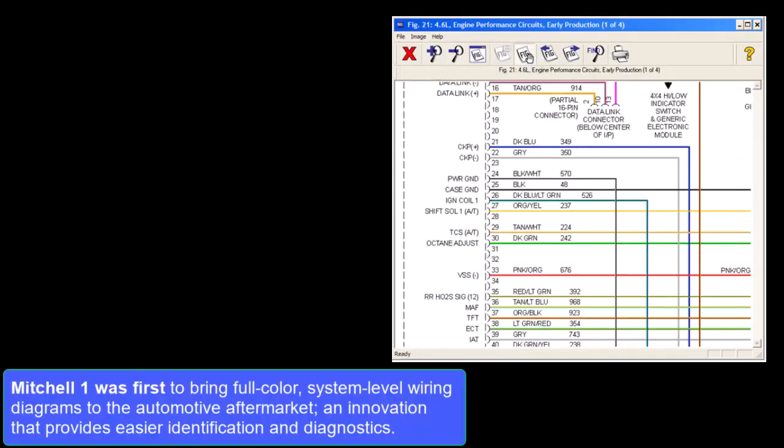Mitchell 1 was first to bring full-color system-level wiring diagrams to the automotive aftermarket, an innovation that provided easier identification in diagnostics. Since these scalable vector graphics, or SVG, diagrams are built digitally like an engineering file, the diagrams retain clarity no matter how much they're zoomed in.

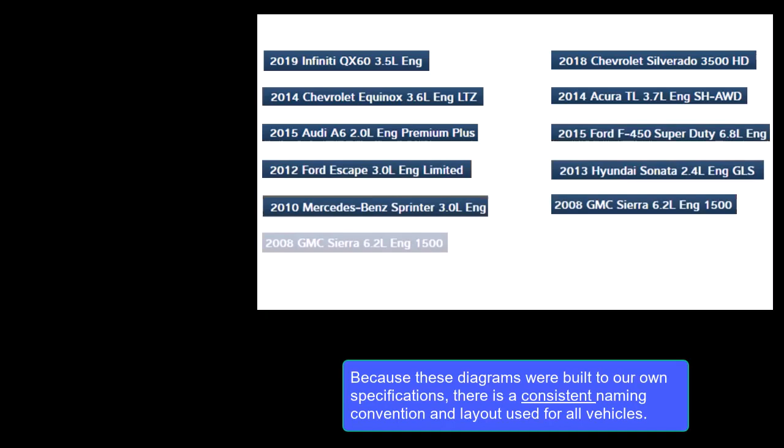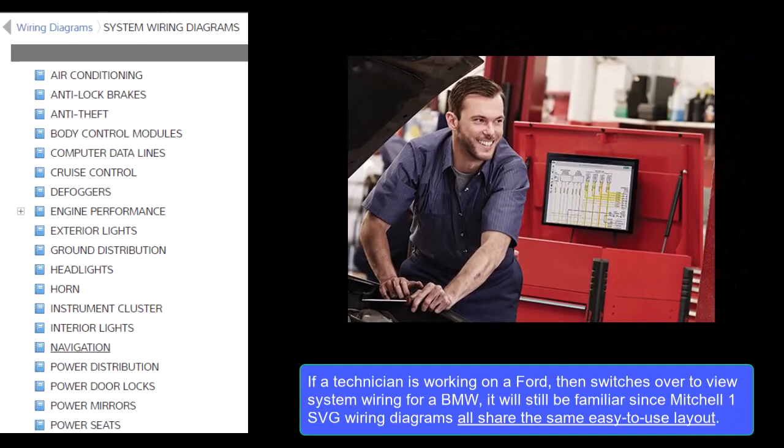Because these diagrams were built to our own specifications, there is a consistent naming convention and layout used for all vehicles. If a technician is working on a Ford, then switches over to view wiring for a BMW, it will still be familiar since the Mitchell 1 SVG wiring diagrams all share the same easy-to-use layout.

With increasing electrical and mechanical complexity, you need wiring diagrams that simplify your diagnostic task. Component focused: with a single click, you can select a component, and this will also highlight all of the associated wires for that component.

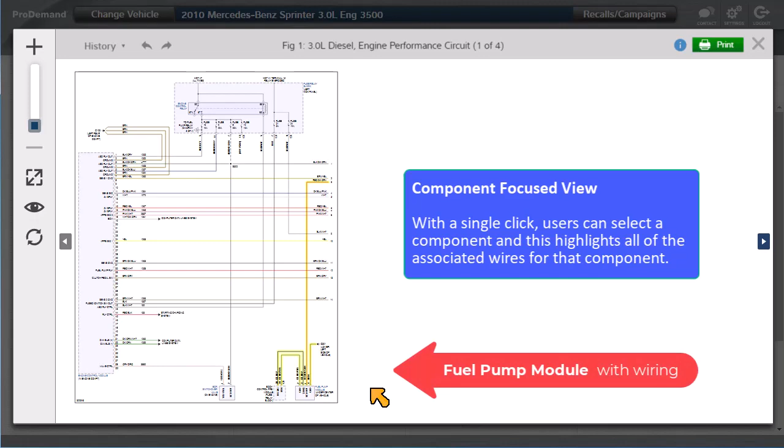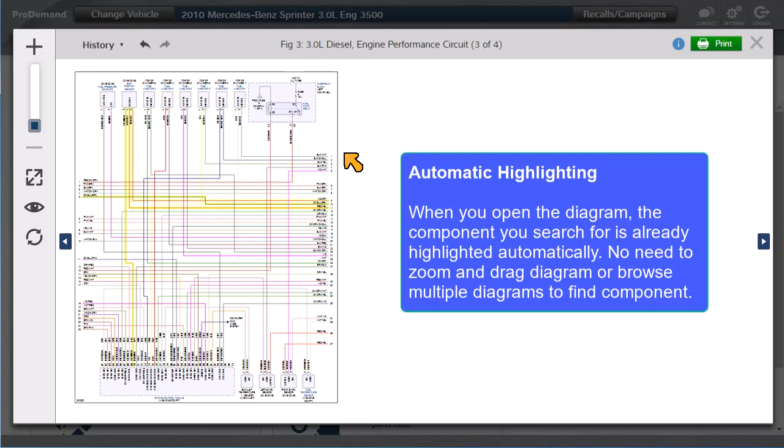After using OneSearch Plus, ProDemand takes you directly to the wiring diagram associated with your search term. Even if the diagram has multiple pages, we'll take you to the specific page. When you open the diagram, the component you searched for is already highlighted automatically. No need to zoom or drag the diagram or browse multiple diagrams to find your component.

Simplified view of wiring diagram. You can hide wires. The hidden wires appear faded but don't disappear completely. This allows you to still see the full diagram while focusing on the content relevant to you.

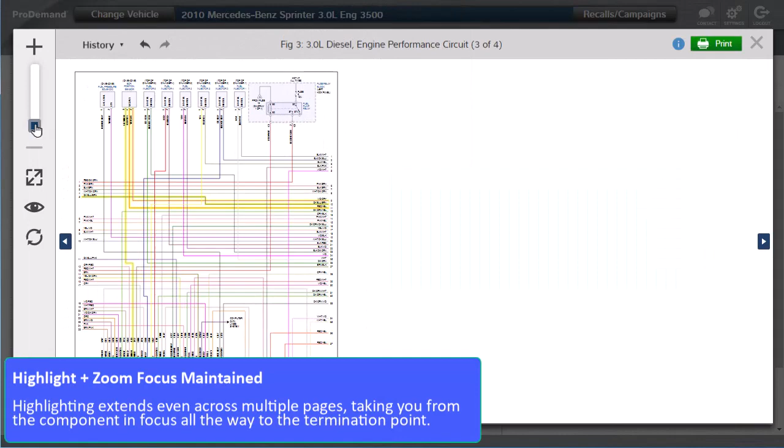Highlighting extends across multiple pages, taking you from the component in focus to the termination point. Pages automatically retain zoom and orientation when navigating to that next page. To drag the page, simply click on the diagram and move it with your mouse.

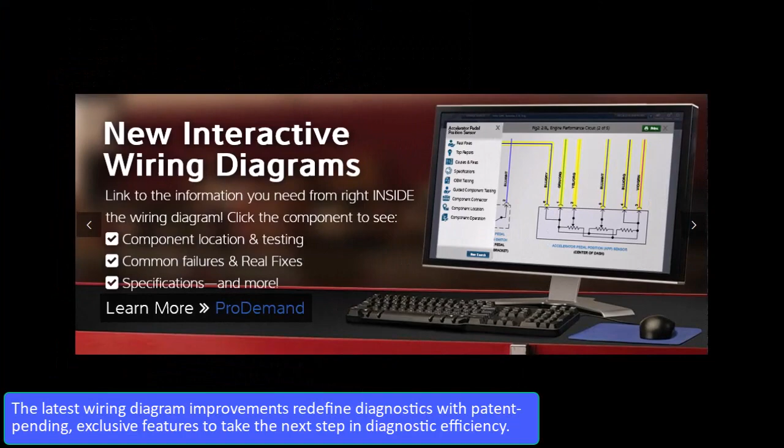The latest wiring diagram improvements redefine diagnostics with patent-pending exclusive features to take the next step in diagnostic efficiency.

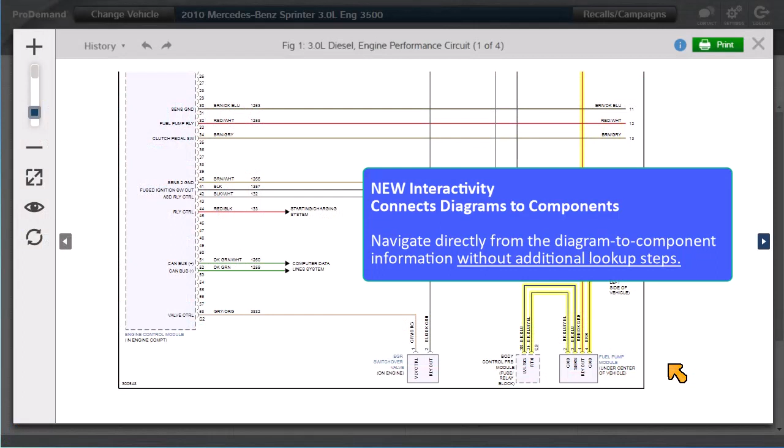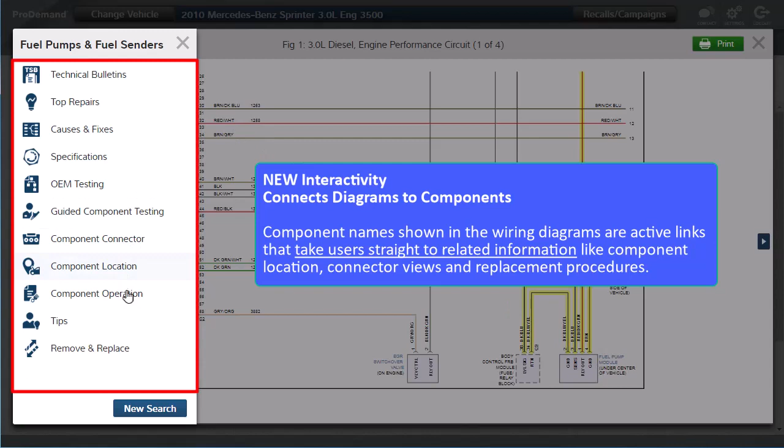Interactivity connects diagrams to components. Navigate directly from the diagram to component information without additional lookup steps. Component names shown in the wiring diagrams are also active links that take users straight to related information, like component location, connector views, and replacement procedures.

You also have one-click data access by launching a search directly from the wiring diagram. A new search button is available after clicking on a component link inside a wiring diagram.

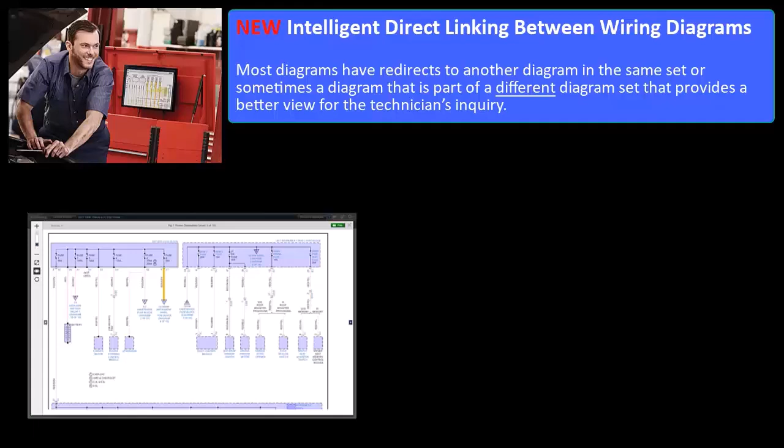New intelligent direct linking between wiring diagrams. Our goal is to bring technicians to the specific wiring diagram with the component and traces for it already highlighted. Most diagrams have redirects to another diagram in the same set, or sometimes a diagram that is part of a different diagram set that provides a better view for the technician's inquiry.

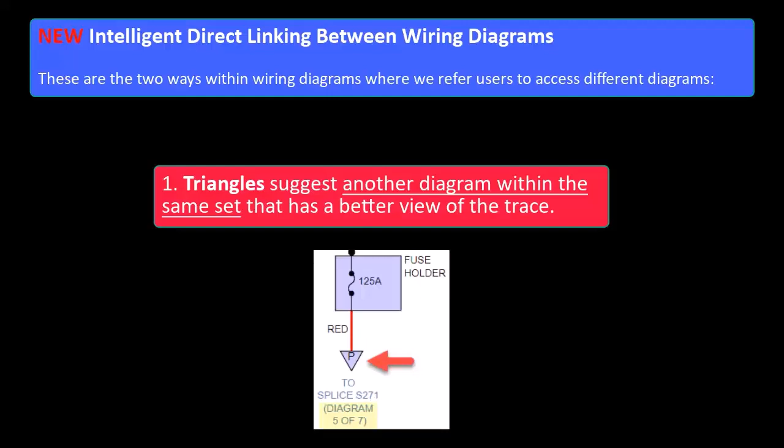There are two ways within wiring diagrams where we refer users to access different diagrams. Triangles suggest another diagram within the same set that has a better view of the trace. Arrowheads at the end of the trace indicate that trace is better served by a diagram within another set.

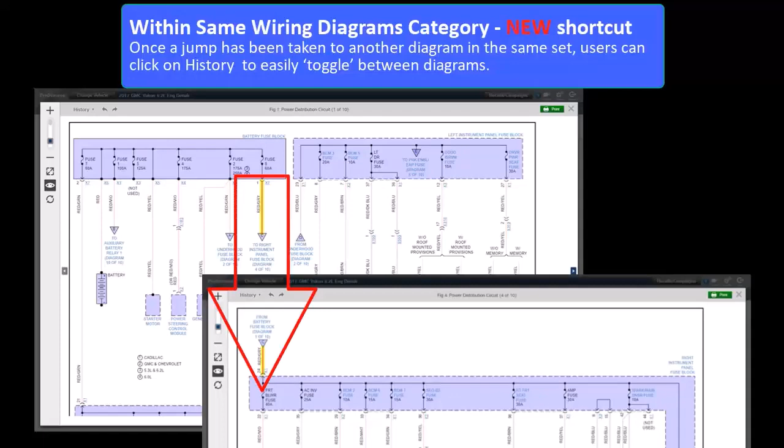New shortcut: now users can jump directly from a wiring diagram to another in the same category with the trace already highlighted. Once a jump has been taken to another diagram in the same set, users can click on History to easily toggle between the diagrams.

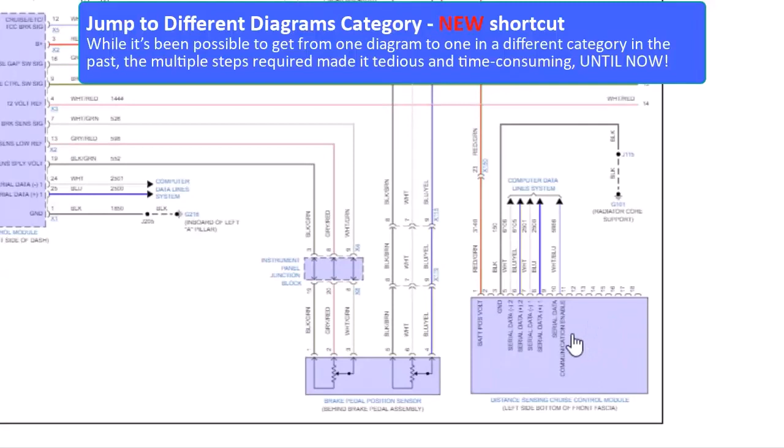So now it's just a single click to get there and a single click to switch back if you need to. New shortcut: while it's been possible to get from one wiring diagram to another in a different category in the past, the multiple steps required made it tedious and time-consuming. Until now. Just click on the jump reference in the current wiring diagram and then be immediately delivered to the related wiring diagram in the different category with traces already highlighted.

New wiring diagram history. We store a list of the last 10 wiring diagrams visited. A user can quickly revisit any of those previous diagrams by simply clicking on the diagram title in that drop-down list.